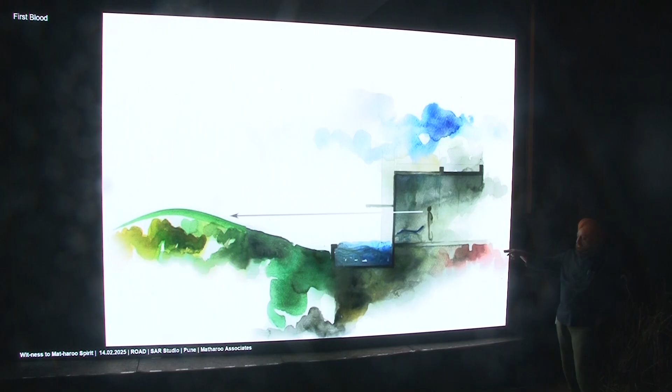We had to design everything in house just to keep the cost very, very low. And that's the section of the lounge, which basically explains that you're cutting off the sky, but you're getting the green and the water to the lounge chair, to the person who is donating.

And that's the building. So everything was wrapped up. It was a curious looking building, and a lot of children come to play here, which is very nice, because this whole inhibition of the blood is lost once you are here.

Some more views. Extremely thin walls, only maximum 5 inches thick, going up to 18 meters high. This was before the earthquake, and this building took the earthquake very well. This was probably one of the only buildings at that time which did not have a single rupee spent in repairs after the earthquake.

So it shook a lot, but it came back to the same position. Yeah, so the curtain wall, which is inside the building, does not take any heat, and there's an atrium space. The laboratories are all showcased, and you have the public domain, which is also with a red stone flooring.

That's another view, and the highlights of the blood storage, etc., are pulled out. This is the hangout balcony. This is the cold freezer, and you have all the processes which are showcased here.

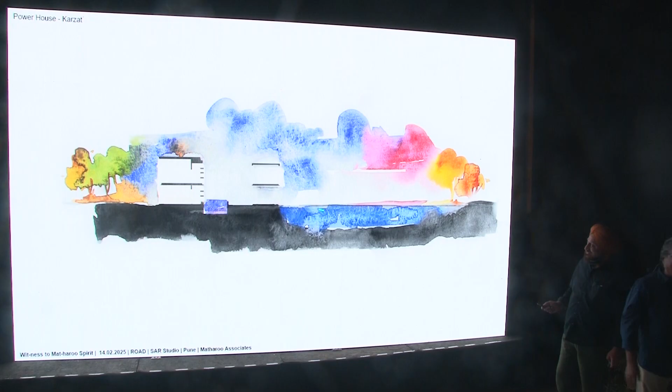So that's the section—this is the living area. These are the suites, and there's a swimming pool. When you're in the living space, you have water on both sides, the river and the pool. The suites have a louvered system that can open and close, reflected in the pool, with the river in front, as natural as it can be—except on some days when you don't see any water at all. It was surprising, because every time I visited the site, at least 25 times, the water was flowing. Then we invited the entire office to visit, and there was zero water—they thought I was bluffing all along.

So such things happen. It's a structural verandah supported on two columns, with a view of the river most of the time. And that's the office—we're not showing the river right now.

Also testing of the cantilever—all the heavy weights are here. I want to make this very clear: people see all the work and good drawings and think it's me behind all of this. None of it is done by me. It's all good, brilliant people in the office who manage everything.

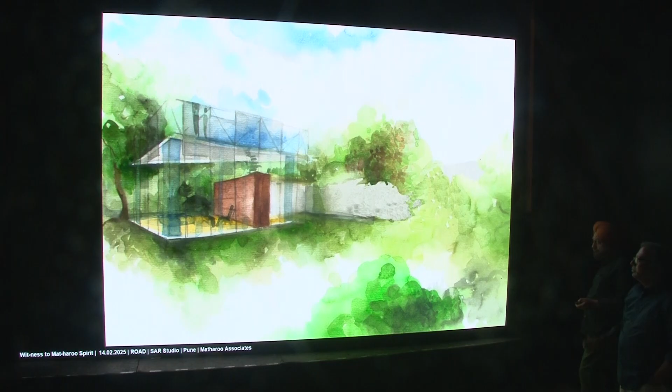This was a client who wanted a house completely open to nature, yet with all the creature comforts. But nature in Ahmedabad is 45 degrees centigrade, so of course he didn't want real nature, just a small piece of it.

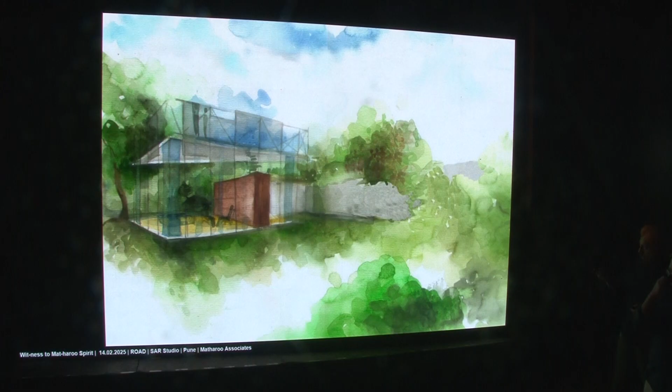Generally, clients want you to work two or three times over—they never accept your first idea. So the first idea is the wildest, you just say anything because you know it will be thrashed. We presented this, saying, no columns, no walls, nature floating all around. We expected him to ask for other options, but he said, this is exactly what I want.

And it was not possible. The idea was that there would be thin mullion-like columns, because he also wanted no insects.

I was amazed—yesterday I was with Shabir in his beautiful Machan, and there were absolutely no mosquitoes. I asked how that was possible, and he said they hadn't faced this problem. That's strange, because in Ahmedabad you can't keep it open. So we said it would just be covered with net, and we needed these mullions to hold the net together.

We thought that would be the structure. It needed a proper slab so water wouldn't come in. The idea was to integrate the steel structure on top with the concrete slab to make it one. The problem was, if the steel came first, it wouldn't hold on its own unless the slab was there. And if we did the slab first, it wouldn't hold by itself with no supports or structure. Finally it was decided we would cast the slab first.

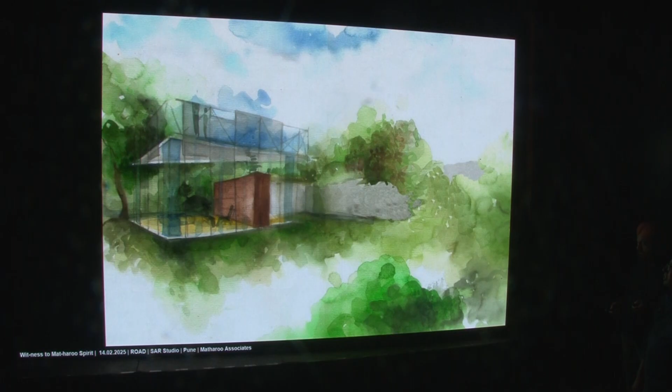So that's the section—you have the thick slab and the structure on top, which goes around and down without touching the slab. The slab was cast; this is a picture of it cast without any support, sitting in mid-air.

Structural calculations start counting loads from the top, so we said, let's start building also from the top. The idea was that the fabricated steel would come and we'd start bolting it. In the 28 days while the shuttering was there, we'd have the steel bolted on top, so by the time you removed it, it would be a full structure.

Only, as things happen, the steel was three months late. For three months, this became a site nobody wanted to venture close by, and a lot of stories went around that they'd cast a slab and were now figuring out how to hold it up.

As he started telling that, there were a lot of rumors going around in the surroundings, of many types. People started mocking the decision, saying he didn't know how to structure a design. Some people started thinking it was a haunted place, because the slab, supported by bamboo props, would start making a creaking noise in the evening and at night.

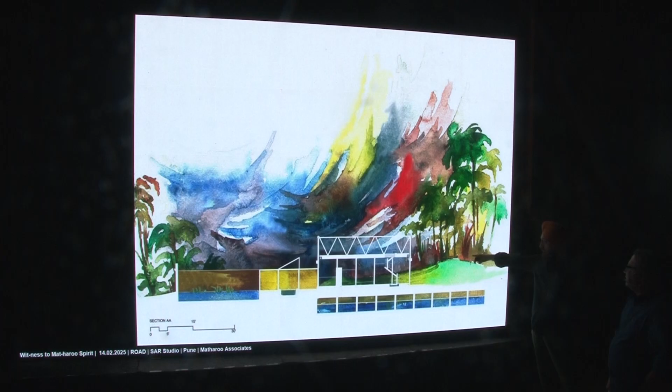Forgot to mention - under this building there is a huge rainwater tank. This building was 40 feet by 40 feet, but the client went in for 14 lakh liters of rainwater collection, so that it could be used for 6-7 months. That is why there was a lot of earth movement here. The earth that was taken out was piled up to create mounds all around to cut it off.

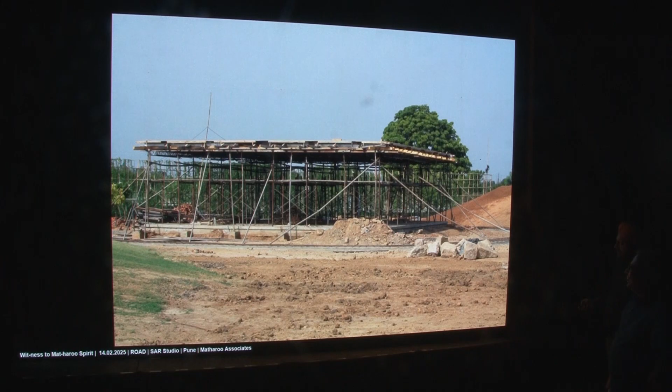There were a lot of donkeys on the site, as mentioned. If we had thought of the story earlier, maybe we would have pictured it with the donkey.

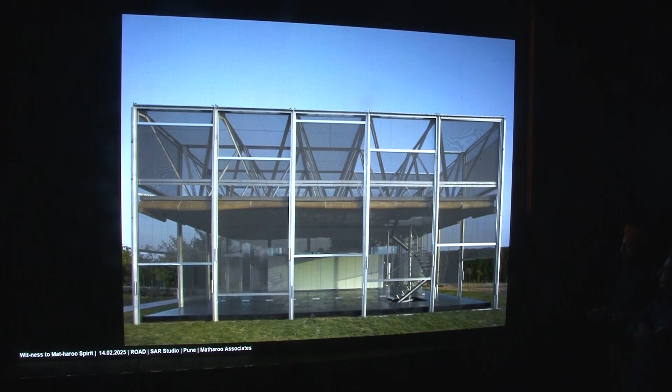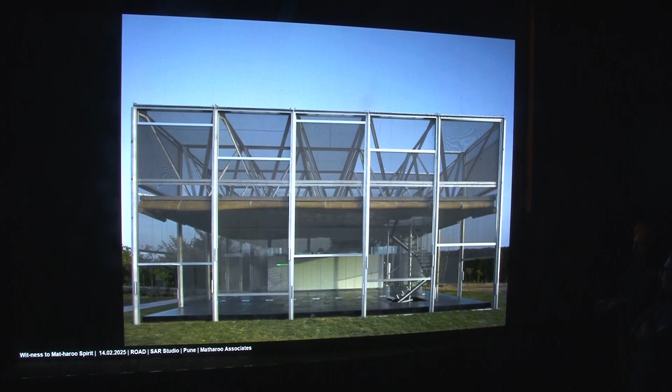And that's the net house. The dictionary meaning of net is from which nothing can be removed, from to which nothing can be added. So it was just minimum, and you can slide the screens up and down. So that's the first layer. You have the second layer of the bamboo chicks, then the glass, and the fourth layer, which is all closed now. Another view of the mound, and underneath there is a lot of water which you can't see.

So there is this, we love, besides doing drawings for buildings, to work with artists. We always try to have some nice sculpture in the building. This is one example similar to what you saw just now, but the water is always rising up and falling. So, one water fountain. Then Rajesh Sagara did this beautiful octopus in one of our swimming pools. So working along with artists is something that we love to do.

In the same net house side, there is an open air shower area with this very rustic, rock-like concrete. Sculptural, man-made god.

This is another project for a temple, for a sect which believes in many gods. We were able to convince them that you don't have any ornament, because we don't know which god to cater to. Let the light play on the walls, and that would be it. And then the centerpiece - instead of having an idol, let's have the shivling in the center. So it's a story about how they got convinced, and because they couldn't afford an artist, they asked us architects - because with architects, the work scope is not defined, they can ask you anything. They said, why don't you do it, we can't afford an artist. So as part of the fees, we also made this sculpture.

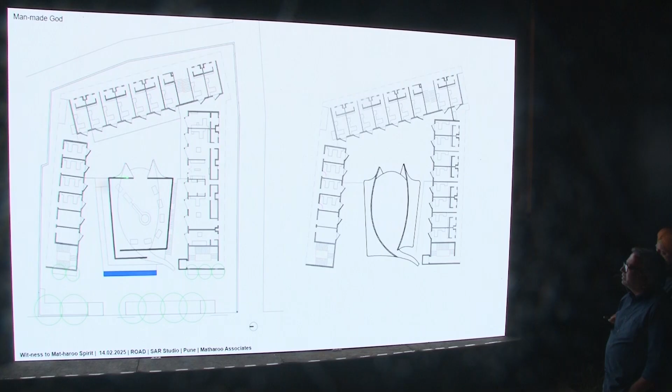And this is the temple. We are surrounded by rooms on all sides, and that's the roof you can see. It starts with a squarish plan, but as it goes up, it opens up, open to interpretation. You can see the form here - this is the base of it, starting like that. As it goes up, it changes.

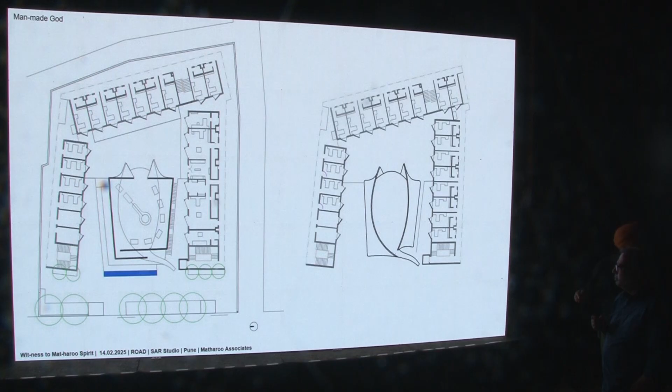So the building itself is quite sculptural. Again in Ajmer, without any previous experience of concrete, we were able to cast this entire thing in concrete, changing form - it was quite commendable work at that time. From the corridors you capture the entire town on all three sides, and the center becomes more sacred and protected.

We do a lot of doors, different kinds of doors. Shabir also showed - I think some of the videos might repeat. This is Lucio, he's the other one - the second foreword is written by Lucio. He's a fantastic architect living in Mexico, and he came to visit a lot of our buildings.

This is brilliantly shot by Edmund, who is here with us. We're going to bring him on sometime.

Another door, which you saw. This is our office where you have these louvers which can slide up and pivot out, so adjustable louvers.

Come to another project called Open Door. Yeah, Vagish.

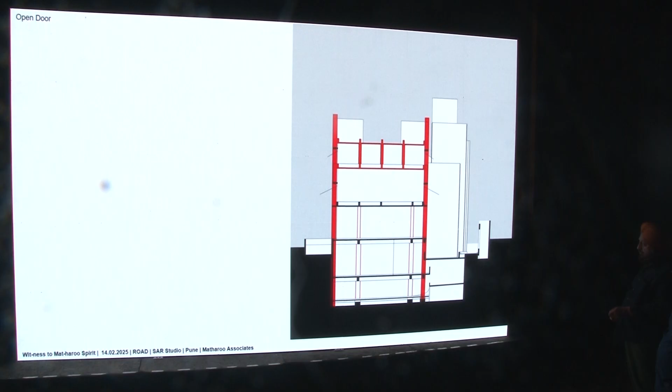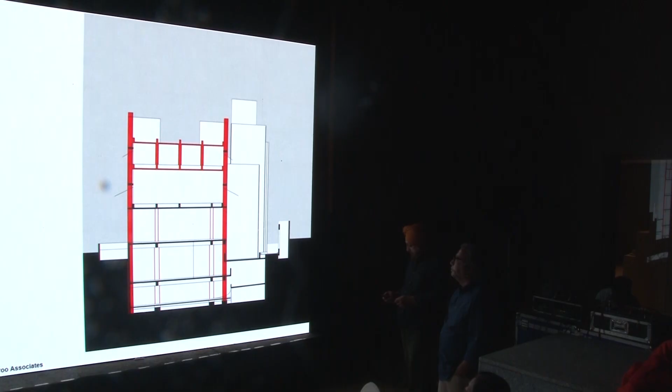This is, one sec, I have to show this. Yeah, so in one of the floors, this is your ground, and you have major parking underneath. And when it comes to the first floor, it's a Vierendeel truss. So columns stop here; this becomes a truss together, and it gives you a large hall which is free of any columns. And the columns reappear on the top floor, the part of the girder, but you don't see them as a girder.

We come to the next chapter, which is getting inspiration from abstract geometry, and there's a project here. Like I said, that inspiration could come from anywhere. Girish also told me there are a lot of students who attend this event, so I thought it is interesting to bring this aspect that you can get inspired by anything. It is not necessarily a linear process.

So some examples of how we have abstracted geometry to get form. These are all cubes which have been diagonally cut to get these geometrical shapes. Another brilliant picture by Edmund, and these are these blocks which are arranged geometrically. Each one is very pure and separate from each other.

Another structure that we carried out where the geometry was a very complex one, and made even more complex with the structure that was used.

So you see the section here, it opens out over this roof into the wilderness. One side there is a lake, and one side the Aravalli Hills, and same on the lower floor. And this is hanging in the middle.

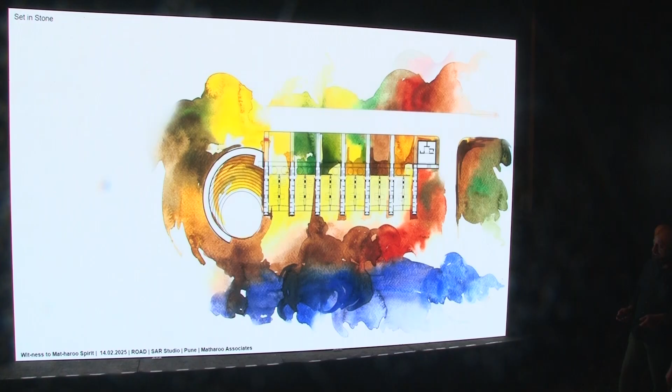And the tower. The plan opens on two sides, fully open. I mean, this is the passage, and ends in an amphitheater.

So every time G looks, whenever I used to travel with him, he would look at the Sintex tanks and says, 'Ki, we had one element that also this industry has taken over, you know' — the one solid element that would be like a vertical element. And all of you architecture students and even young architects, when it is a thesis project, there has to be a vertical tower element, shadow of which will fall onto the amphitheater. And that's what is a glorification of thesis actually.

Now with this industry which has solved all the leakage problems, etc., whatever little element that we had is also gone. With gravity, etc., they were giving many interesting items, whether it is a vertical tower or this, that, etc. So they would give some elements to play with. Now that has all been taken over. So this story is actually about this element.

So in this case, every time G looks at the ugly Sintex tanks crowning over the tops, his mouth waters. He sees an opportunity there, actually — to make it happen. Okay, that's how it is.

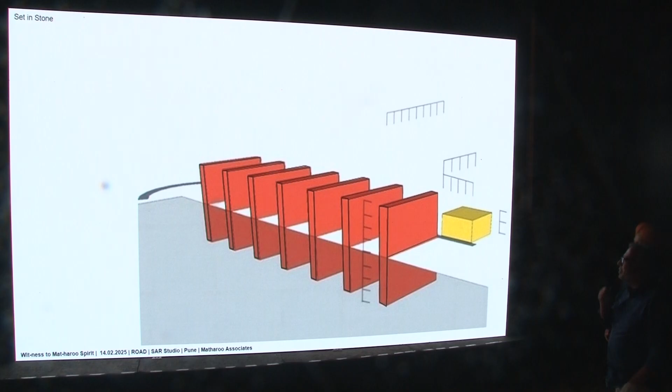So these are the walls, and it was for the Jain pilgrims. So we made 24 suites, one for each Tirthankara. And so there were certain number of walls, dimensions, etc.

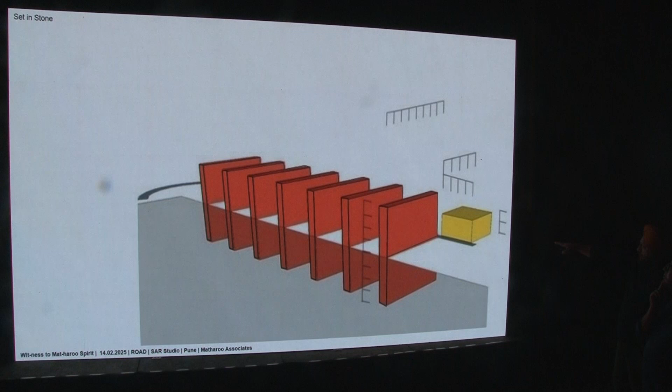So that was the module. Finally, you have the same module in the yellow box, which is the administrative block. And when you put them all together and take this yellow box and join it, it becomes a perfect cube. So the entire mass can finally come together.

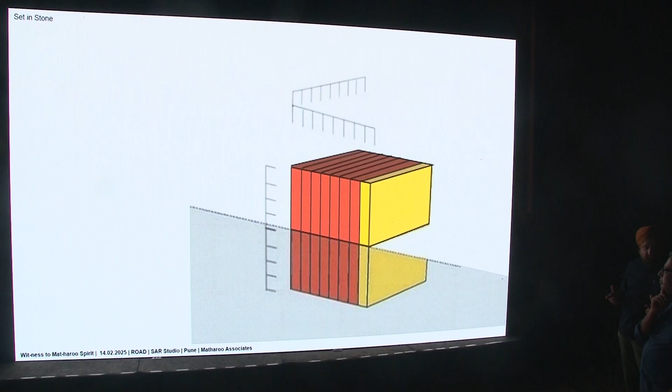And the story is that if it becomes a perfect cube, then where is the tower? There is no place for the tower. Yeah, that is the room which opens out on two sides. So you can see just plywood partitions, and you have the stone wall which is continuing inside. That's the passage.

We were going to do the slab on top, but then they carry the drinking water on their shoulders up, so they needed some clearance for that. So we had to go for this polycarbonate sheet, and like in line with our shooting with the animals — there are 10,000 cows in this campus, so they circle around this dharamshala also.

Let me just, so just go back. Oh, sorry.

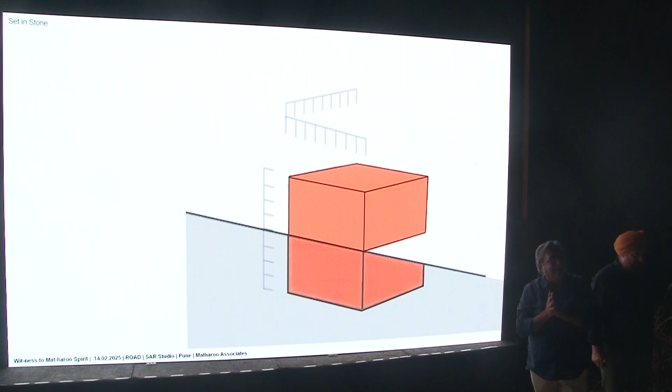He showed that cube with a perfect geometry, and separating out those elements will give them space, etc. And he asked that question: where is the tower? He needed one to anchor that cube and make a dialogue between that, whatever form comes out of it, and something that pins it into the ground.

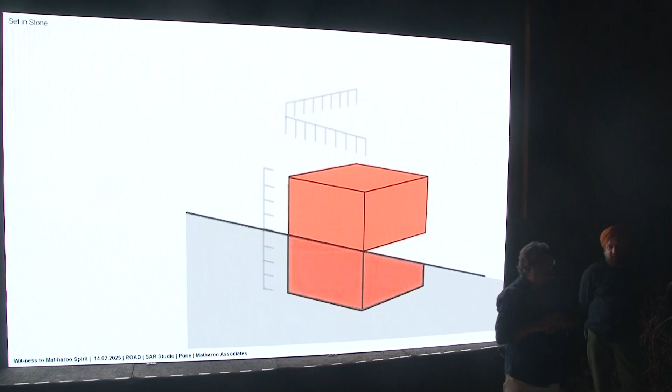So with his smart head, he said we need a water tank. But clients were more smart than that — they already have a much bigger tank, much higher than that. So now what to do? How to bring a tower?

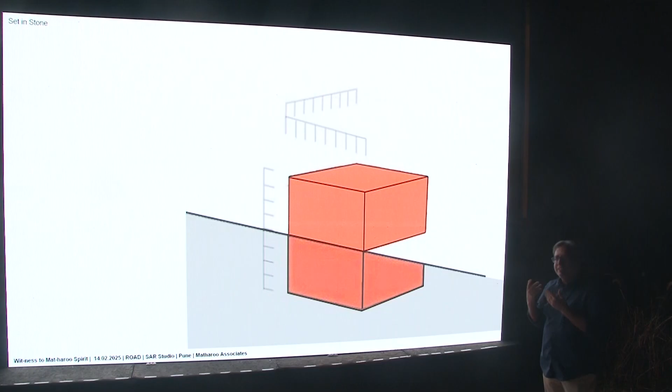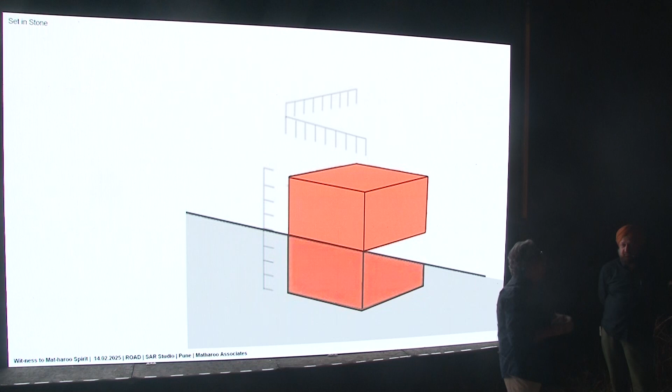He also realized that in India we have this negotiation of feeding certain animals and getting the punya of it. He had seen it, maybe he believes it, I don't know, but he thought he should use that phenomena. He told them we need a chabutara for devotees to come and feed. If you look at quite a bit of Rajasthan and even some parts of Gujarat, the community builds chabutaras actually, so they agreed that we can have a chabutara. So the tower story started.

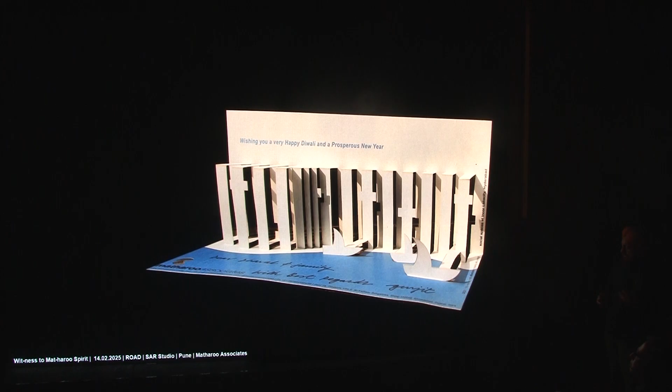So this time around, we thought we've been doing these cards for 20 years, making buildings into cards. Let's do the reverse — let's take a card and convert it into a building. So this is a building which is called cut, fold, bend, and play. It's basically one single plane, which is then made into all the elements of the house.